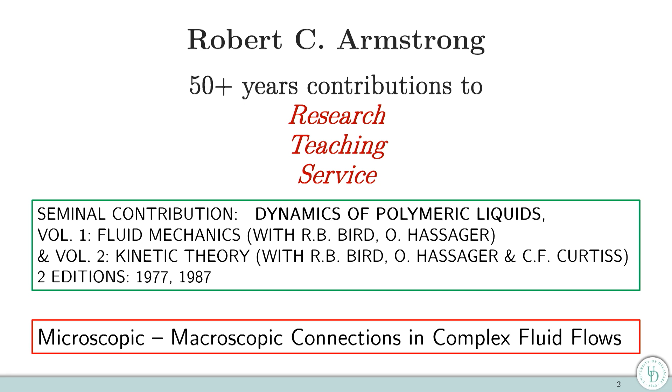But before that, let me say a few words. It gives me great pleasure to be here to participate in the celebration of 50 plus years of contributions of Bob in research, teaching, and service, and a contribution that I would like to singularly highlight. It has already been mentioned many times. It's the critical participation in this monumental work together with Bob Bird, Ole Hassager, and Curtiss in developing this dual exposure both in macroscopic fluid mechanics and in microscopic kinetic theory of the dynamics of polymeric liquids.

And it's really this connection between microscopic and macroscopic that has influenced me the most since the time that I worked with Bob and Bob, especially the contributions of Bob Armstrong in this microscopic development, whereas with Bob Brown we emphasized a lot more the macroscopic developments and the computational ones. So I want to bring forward this connection to my most recent work, which deals with a different system than polymeric liquids, that of aggregating suspensions, which are very common, from drilling fluids to blood, clay, ceramic suspensions, food, and so forth.

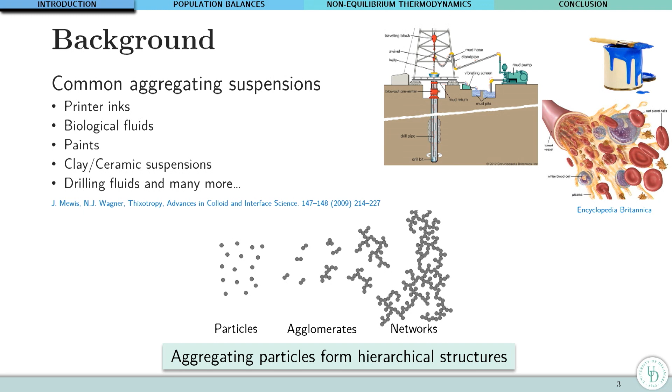Really, the key characteristic and connection with polymers is the development of an intermediate mesostructure, which eventually has a lot to do with polymeric networks. And this is one of the contributions in their modeling. But one needs to take into account the microstructure. So this is what I would like to highlight here, the influence of the microstructure in the development of proper models.

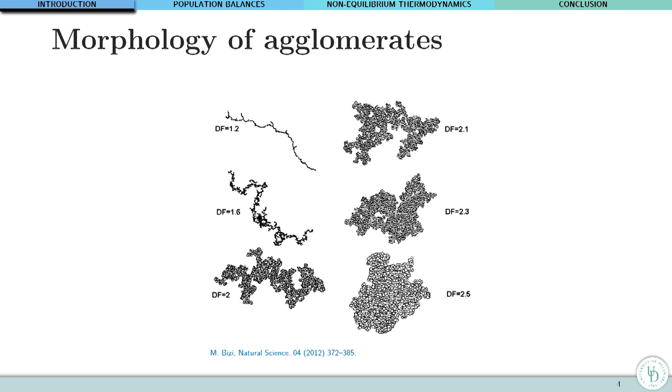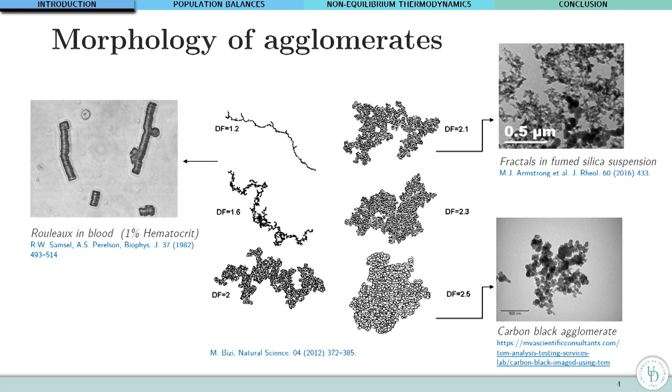And this microstructure can be very different depending on the characteristic dimension of the fractal structure that you end up having in most of these systems, as they tend to aggregate from a more or less linear structure, which is commonly seen with rouleaux in blood, to a planar structure seen in aggregating fumed silica suspensions, to a more globular one that you see in carbon black with dimensions going close to 3. So how do you explore these changes in developing a proper framework? These are the examples that I just mentioned, from blood, from fumed silica, all the way to carbon black.

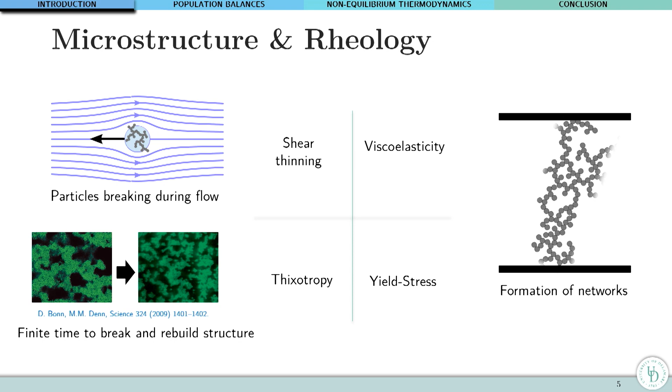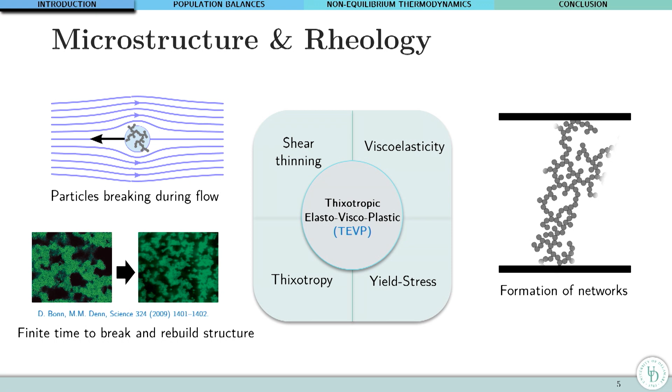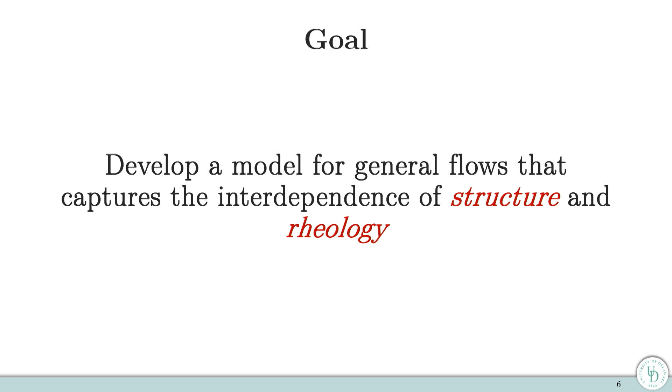From our perspective it was to find a proper way to connect structure and rheology within a framework that respects the thermodynamics. The two main ingredients I want to present to you involve, from the microscopic perspective, the use of a population balance approach, which Ramkrishna has been key to develop for many reacting systems, which in this case involves the analysis of processes that generate larger aggregates from smaller ones, as well as the breakdown of large aggregates into smaller ones, probably under the action of the flow.

And on the other hand, trying to incorporate this microscopic physics into a framework that is respectful of non-equilibrium thermodynamics, based essentially on a theory that I had developed after I left MIT, together with my former graduate student, Brian Edwards. He's now a professor at the University of Tennessee, and we exposed it in a research monograph entitled Thermodynamics of Flowing Systems, which appeared in 1994.

Essentially, the key component there is the description of the dynamics in terms of reversible phenomena, which can be described using a least action principle or Hamiltonian mechanics, and a dissipative contribution, which is described at this level in terms of a dissipation bracket describing the effect of a generalized functional. All right, so let's see very quickly just the schematics of how things work.

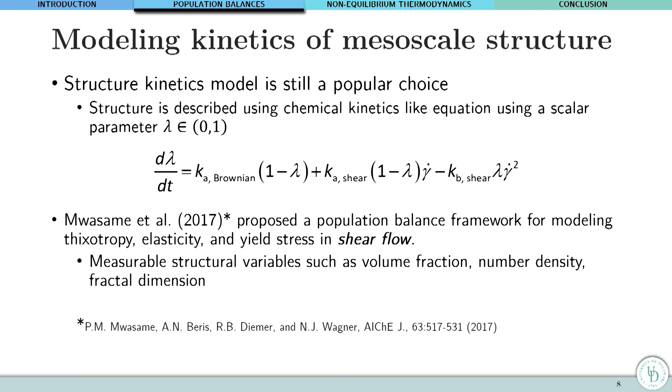So coupling this type of a kinetic expression with expressions for the stress that come typically from either the theory of plasticity or from viscoelasticity, many workers and also ourselves with our former student Mwasame came up with theories that were pretty good in predicting the behavior of aggregating systems fairly accurately, but with a problem. The problem was that the theory contained too many parameters and was primarily applicable only for shear flows. So if we want to extend it and reduce the number of parameters, this is where the microstructure comes to be of importance.

And using the population balance, just pay attention to the fact that there is a fundamental equation that describes the population of every size of aggregate, M representing the number of primary particles that constitute an aggregate. And this expression is an integral one which involves contributions which result either in the restructuring or the breakage of those structures, with well-specified kernels from previously developed expressions based on the collisions between different aggregates. So having this microscopic analysis, one connects it to rheology.

At the first stage, we did that simply developing expressions for the effective viscosity of suspensions that contain multiple aggregate sizes, and also evaluating an elastic contribution by connecting an effective modulus of elasticity to the effective volume fraction of the aggregates. As the aggregates have a fractal nature, they tend, when they form, to effectively increase their volume fraction and therefore their impact on the viscosity and rheology.

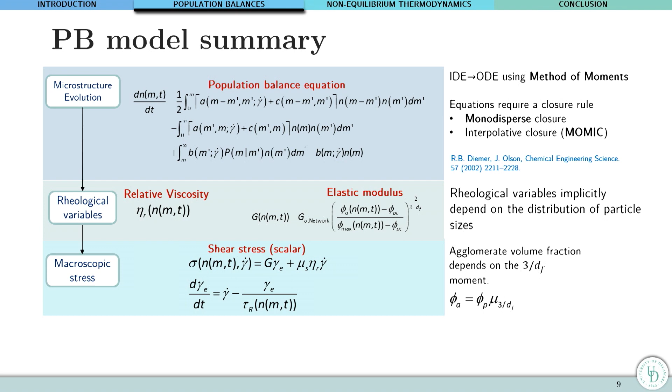One of them referred to blood rheology, where, as I mentioned, the aggregates are in the form of rouleaux structures, one-dimensional. And here is a comparison of steady-state data for the stress with respect to the shear rate for two different donors. The donor experimental data are given by the symbols. The dashed lines show the perfect agreement with the results of the previous theory that I mentioned, which was fully phenomenological. The present one, introducing additional constraints, gives semi-quantitative agreement only, but at least gives the promise that this is a way to move forward.

We also examined the behavior in transient flows, as for example the one that you obtain using unidirectional large amplitude oscillatory shear, where you superimpose oscillatory shear with steady shear, and you represent the behavior in terms of a curve that shows the stress versus the strain for different values of strain amplitude and frequency, and one can see reasonable agreement at high values, but some disagreement at lower values in this analysis.

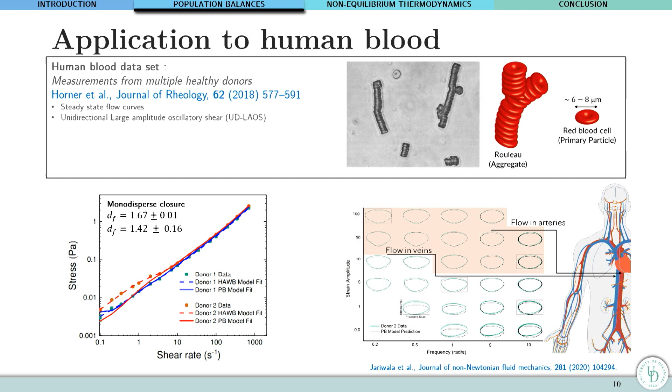So the next level: this analysis here was performed for simplicity by using a coarse level description of the microstructure, where all the aggregates were assumed to have the same effective size, which was allowed to vary with varying shear rate. The next evolution was to use this MOMIC approximation, which stands for moment interpolative closure, where we assume a certain distribution of the sizes, in this case a log-normal distribution, and we were able to accommodate more faithfully the change in size.

We did that approximation for a better behaved system which didn't have all the complexity of human blood, that is, that of carbon black suspension. And what we were able to show, as you can see now, is that for steady state data, we are now able to achieve a quantitative fit. And also, what is of importance, of course, the errors are uniformly much lower than the monodisperse previous approximation. And even more importantly, we did generate some data.

We had to fit rheology to obtain the best value for the dimension of the fractals. And that fitting value came very close to the independently evaluated value through small angle neutron scattering. And this is the detail of the analysis that allows us now not only to see a change in the mean size of the aggregates with increasing shear rate from 5 to 2500 reciprocal seconds, but also a change in the width of the distribution.

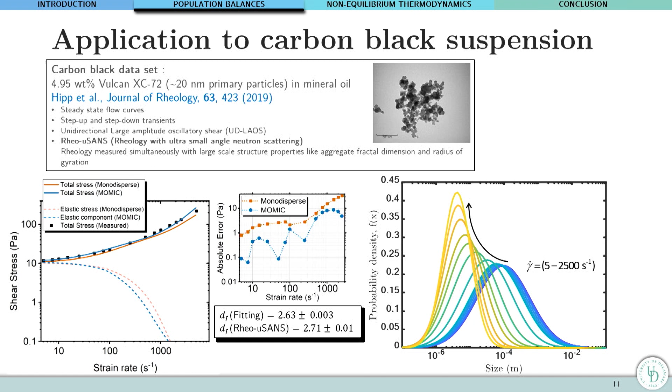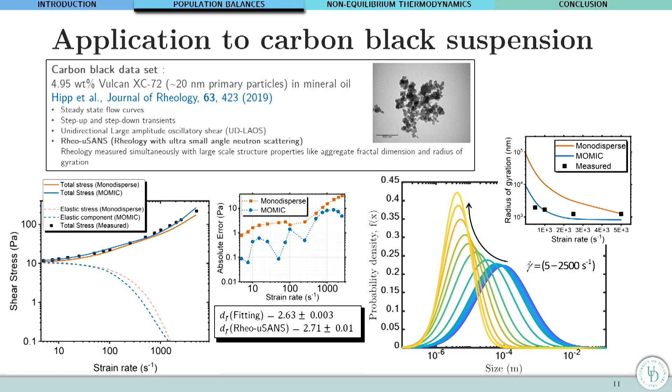Finally, the latest development is to incorporate this analysis within a consistent evaluation of the macroscopic equations based on non-equilibrium thermodynamics. I will only get you very quickly through the essence of the theory. It really imposes specific constraints so that in addition to satisfying, of course, the first law of thermodynamics, the constancy of the Hamiltonian, which is the total energy of the system, the entropy generation is always non-negative, and the dissipation reduces with a perfect satisfaction of the Onsager-Casimir reciprocal relations next to equilibrium.

The Poisson bracket, you get it by using Hamiltonian mechanics. In particular, you can get it directly from the least action principle. The irreversible dynamics, you get it by assuming a symmetric bilinear form. You start this expression by focusing on a number of variables, which for this system involves certain moments of the distribution and a conformation tensor to describe viscoelasticity.

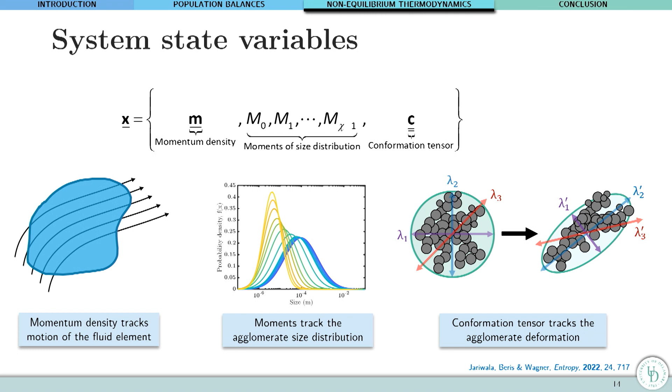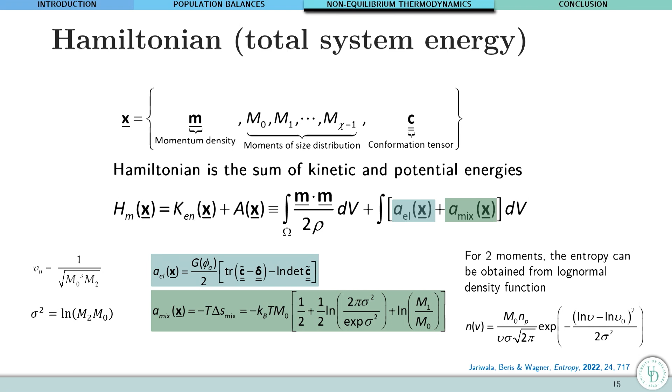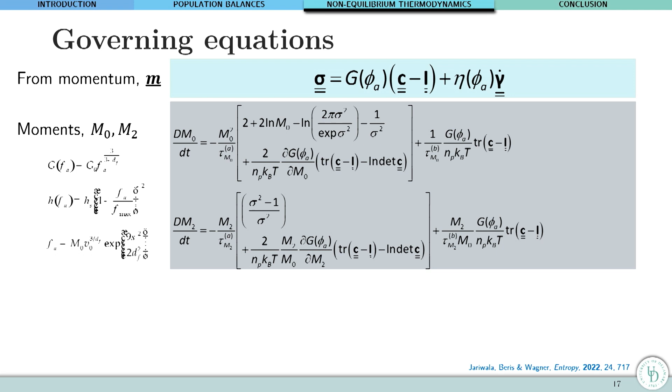So this really comes along with the kinetic theory that Bob pioneered describing the effects in polymer fluid mechanics using structure and conformations. And that is introduced into a consistent description of the Hamiltonian or total energy, which involves two terms, one describing elastic effects, the other one mixing effects. And then using moments, we can evaluate consistently those terms and then use the dissipation bracket. I won't bother you with the details. You can find them in this paper that appeared in Entropy last year.

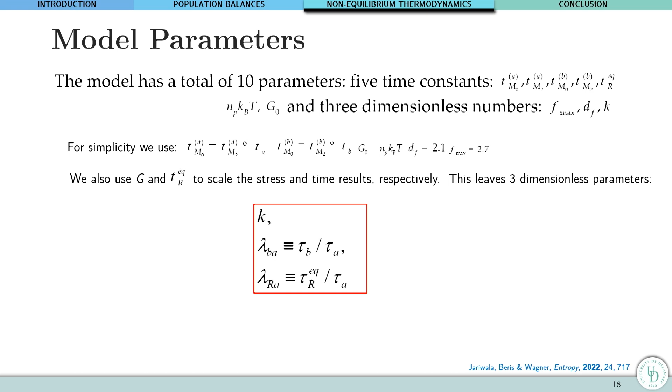But the fact is that there are calculations which you can go through and evaluate the final results. And at the end, in the final results, many of the parameters now have physical meaning. We can make reasonable assumptions, end up with only 3 parameters to vary, this K and 2 characteristic time constants, and then end up describing thixotropic viscoelastic behavior as an apparent viscoplasticity, as you can see here, because we just wanted to show in this work a proof of concept, but we describe very important effects that you couldn't get otherwise, genuine non-Newtonian effects, as for example, normal stresses that grow like the Weissenberg number at high Weissenberg numbers.

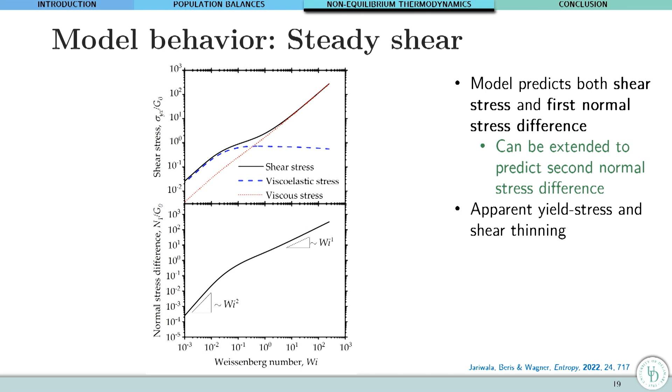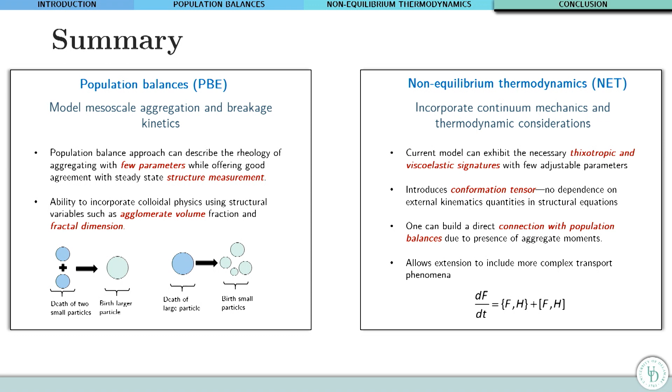So in summary, combining microscopic analysis with thermodynamics, we feel, is the path forward to be able to extend microscopic analysis results to arbitrary flows and describe fully non-Newtonian phenomena.

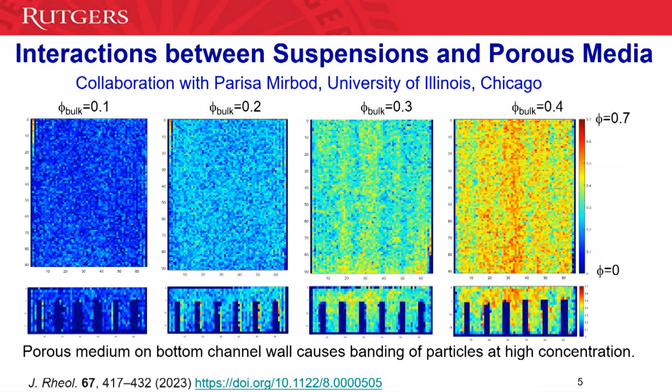So what we were able to see here is if we look at a top view of the channel, or if we look at the flow coming straight towards us, we can see that structures are forming in the particle concentration as we go from a semi-dilute suspension to a concentrated one. And we can see that banding is forming, which is dictated by the spacing of the porous media, since the particles find it easier to move in between the square array of rods than on top of them.

Another project that follows the suspension theme is cake filtration of catalyst materials, which is basically like separating an existing suspension. And this is how catalyst supports are collected after they're manufactured in solution. But with fine particles, as those supports typically are, it's difficult to predict what will happen during filtration.

Often it's hard to predict the pressure drop or flow rate, and typically because they're fine particles that can pack so closely together, you have issues with very low permeability. And it's hard to drain the solution out of the cake, and it's hard to wash it afterwards.

And so we've been working to try to identify key parameters that determine the filterability of catalyst materials, and also applying non-invasive imaging like nano-CT to characterize the filter cakes once they're formed. And typically they're considered like a black box. And so we're trying to look inside the black box of the filter cake and see what's the structure.

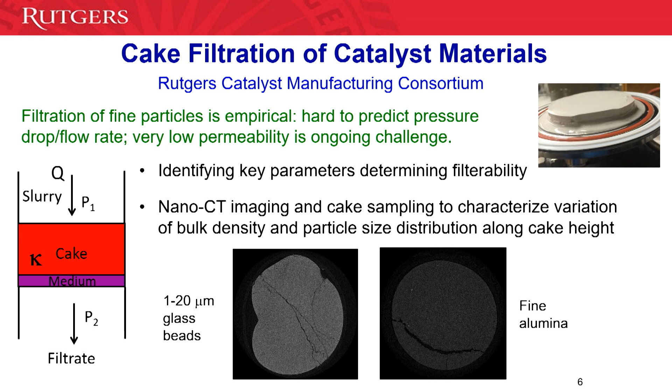And then in terms of the theme of sustainability, I've gotten very interested in the area of water purification. And so we also came up with a particle technology to aid water purification, where we used naturally abundant polymers like alginate and chitosan that are benign carbohydrates. And they also have a very high affinity for heavy metal ions. And so we make hydrogel particles out of these polymers, and we make aggregates out of the oppositely charged alginate and chitosan, and then we characterize their adsorption properties.

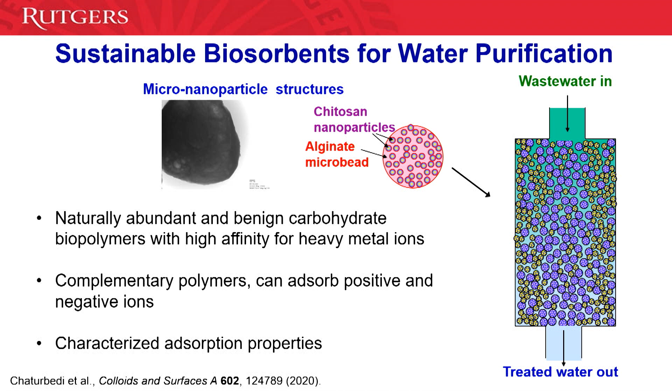And then I realized that I've also pursued some industrial collaborations that are related to sustainability, one with a big company and one with a very small company. With Andrei Potanin at Colgate-Palmolive, we were trying to understand the flow properties that lead to the heel. That's the material left behind after draining a tank. So if you imagine some personal care product like toothpaste or gel or shampoo, in the draining of a tank, we were trying to relate the presence of the heel to the flow properties such as the yield

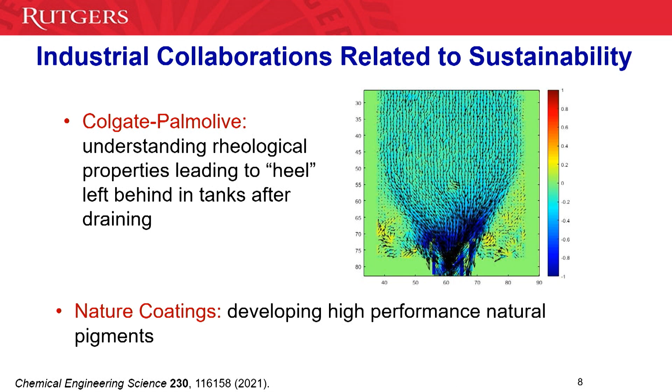stress and composition. And then with the startup company Nature Coatings, we've been developing high-performance natural pigments, trying to replace existing hazardous or synthetic materials with benign natural ones, but get the same level of performance in terms of binding to a fabric. So those are some themes from my group.

And then I wanted to add a slide about ideas about rheology and energy, since Gareth suggested that we should try to connect the morning and afternoon themes. So I wanted to highlight a recent project at Rutgers. I'm actually not part of this project, but I thought it was very interesting that I have some colleagues working on this. It's called RAFT. Basically, it's an array of turbines for hydrokinetic energy harvesting. The investigators are Onur Bilgen and Roger Wang in mechanical engineering and civil engineering at Rutgers. And I thought that hydrokinetic power was a really interesting idea where basically you're just trying to get energy from a flow of water with no dam or anything like that.

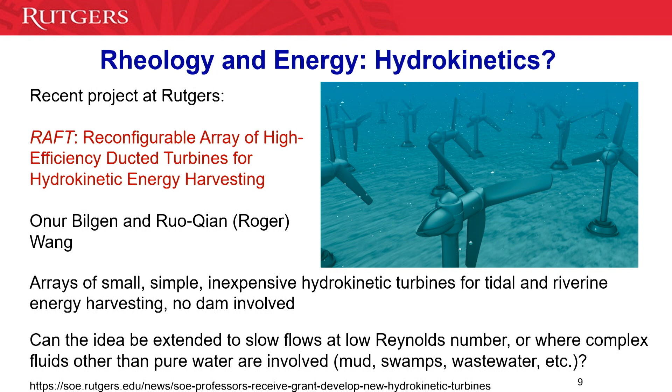And so what I was thinking was, can this idea be extended to low Reynolds number flows, where maybe you can use the unique properties of the low Reynolds number environment, or where you could use it on complex fluids other than pure water. And so I feel that hydrokinetic power hasn't been fully realized, and that it has potential for energy research of the future.

And then I just wanted to close with a story. When Bob and I would meet to talk about research, when I was a grad student, sometimes I would be explaining some problem with my experiment or some question I had to Bob, and he'd get this really, really far away look in his eye. And I would think, oh no, I'm boring Bob. I'm putting him to sleep. This is terrible. And so I would start talking more and telling him more things about my experiment.

And it took me until the very, very end of my PhD to realize that when Bob had that look, he was thinking, really concentrating, and that I should just listen quietly and he would tell me another great idea. So that's what I learned. So thank you, Bob, for everything you've done for me and all of the students, and congratulations. Thank you so much.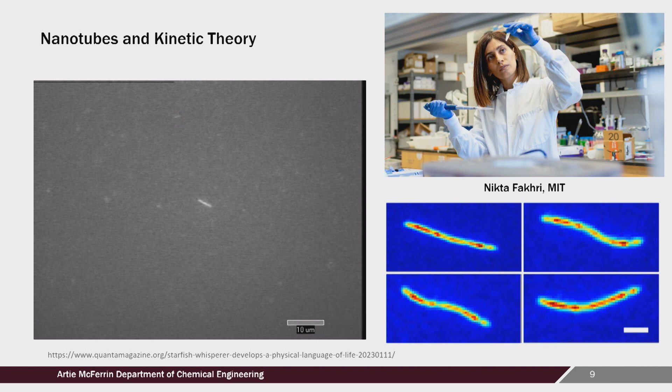And what's amazing is she used fluorescence imaging of nanotubes to go back and test theories about polymer dynamics that had been formed in the 70s, right? But it was like, now we have an actual model polymer we can look at and watch how these things move and watch how they diffuse, and actually showed which of these theories from the 1970s, work of de Gennes and others, would actually apply. We also applied these same kind of concepts to rheology of nanotube suspensions.

So sometimes you can get a little too deep into all the equations and you get to the point where it's just a math problem. But what you have to remember is the idea of ultimately there is going to be an experiment that measures the rheological behavior of these suspensions. So most of us are familiar with shear viscosity, shear measurements. But you can also do extensional viscosity measurements. Gareth has done a lot of work in that area.

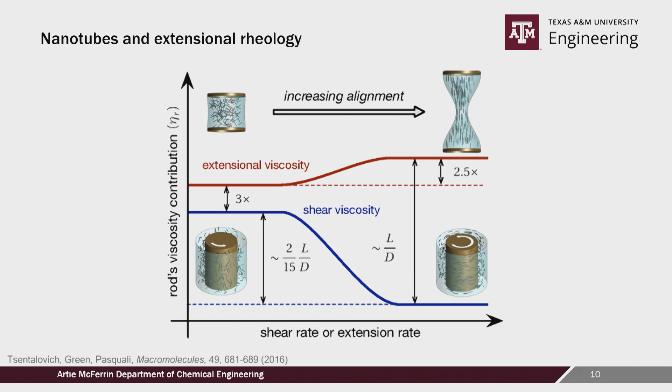And what's interesting is using kinetic theory, you can say, if I have a suspension of Brownian rods, can I predict the behavior, the shear rate dependence of the shear viscosity and the extensional viscosity? How does that relate to the length of the nanotubes? You can come up with equations that actually show, if you make the nanotubes longer, here's how that will impact their extensional viscosity behavior. And if you have that equation, then that means you can actually measure nanotube length with your rheometer.

And you think like, is that good? Is that good to use a rheometer? Wouldn't it be better to use a microscope? When you use a microscope, you're seeing a few dozen nanotubes at best, whereas you're seeing trillions of nanotubes in their collective behavior and the way it cashes out in their rheological behavior.

So we got to the point where we could measure the extensional rheological behavior of nanotube dispersions and the shear rheological behavior of nanotube dispersions and back out the nanotube length. Isn't that amazing that you can do bulk rheological measurements on a big giant rheometer and back out nanoscale quantities? But that's what theory allows you to do.

Just to continue on to some of the work that's going on in my own group, one of the things we've become known for at Texas A&M is using electric fields on nanomaterials. It turns out nanotubes heat up like crazy in response to electric fields, and that turns out to be really useful for lots of practical applications. But one of my students also noted recently, said there is some stuff in the literature on how nanotubes will actually align in response to these electric fields.

And so he did a series of experiments where he showed, yes, the nanotubes will align in response to the electric fields, but they also heat up. So if you have the nanotubes in a thermosetting resin, like epoxy, you actually have a race. Which one will win? Will the nanotube be able to align? Or because it heats, will it cure the polymer around it and lock itself in place? And depending on how you tune that electric field, you can see both behaviors happen.

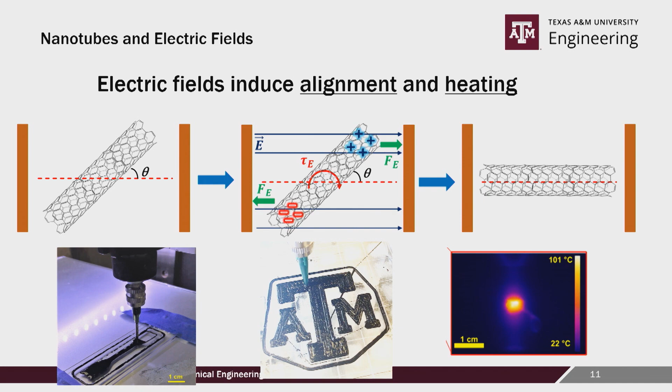And even if you manage to get your tower of epoxy to hold, you go set it in the oven and you begin to heat it up to cure. And what happens to the viscosity as you heat it up? The viscosity goes down, then it begins to cure, and then it goes back up.

So to get around those problems, we used electric fields, not just to align, but to heat these nanotubes so that as you print, it cures the resin. So instead of like building this little tower and hoping to God that it doesn't fall down, you print a layer and then use the electric field, cure a layer, print, cure, print, cure, print, cure. And you can print virtually any thermosetting structure you can think of using that technique.

That paper should be coming out fairly soon. But more important than any of the technical things that I got to discuss with Bob, Bob was really a mentor to me in terms of my career and work-life balance and things like that. Those of you who know me know I have a little bit of nervous energy sometimes. I'm a little bit of a nervous Nelly, as my father would say, and I was nervous about the prospect of going into academia. I mentioned this to Bob.

I thought, getting an academic job is scary. The tenure clock is scary. All these things are scary. And as y'all know, Bob is a pretty low stress individual. And he told me something, and I'll never forget it. He said, Micah, what you should do is work on the problems you think are interesting and important. And in terms of the time that you have to put in and work-life balance, you should work how much you think is appropriate. And if that doesn't get you tenure, then you don't want to be there anyway.

And at the time I thought, easy for you to say, very easy for you to say. But now that I've been through a lot of this, I now see that he was right. And part of what he was communicating is that the work is not something that we do to prove that we can do it, to prove that we're smart, or to build up our own value and identity. That's not the point. The reason we care about our research is because it's a beautiful, wonderful opportunity that most humans will never have.

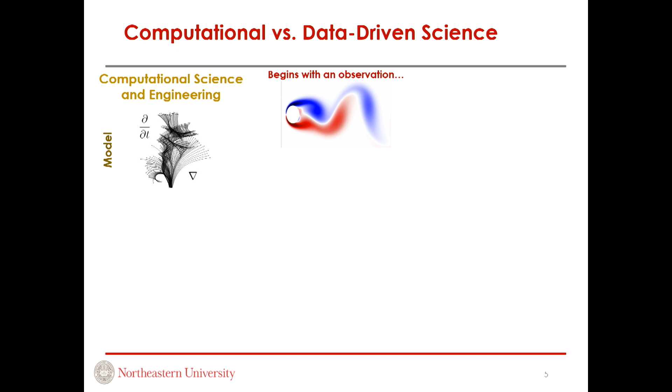So no matter if you're thinking about computational or data-driven sciences, you always start with an observation. This is an example that fluid mechanicians love, flow past a cylinder. In computational science and engineering, what you do is you take a model that describes that phenomenon. For example, that could be Navier-Stokes, your conservation laws, your equations of interest. You discretize that equation over a certain domain using polynomials, different weight functions, you name it, and then you pick a numerical solver to solve it for that particular flow problem using the methods that I already mentioned.

In data-driven sciences, you can still use the same model. So the guiding principles, the physics, is still exactly the same. Instead of discretizing it, you represent it through different methods that are data-driven, for example, neural networks, transformers, graphs. And then, instead of numerically solving it, you use inference models like Bayesian inference or maximum likelihood. And that allows for the solution of that particular problem. Now, again, the key is there, right? To be able to put the model into your machine learning platform.

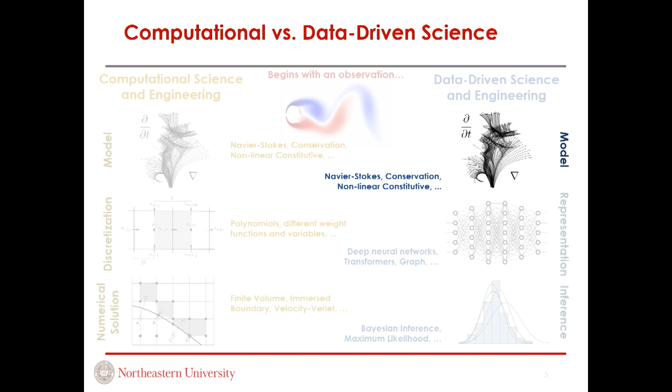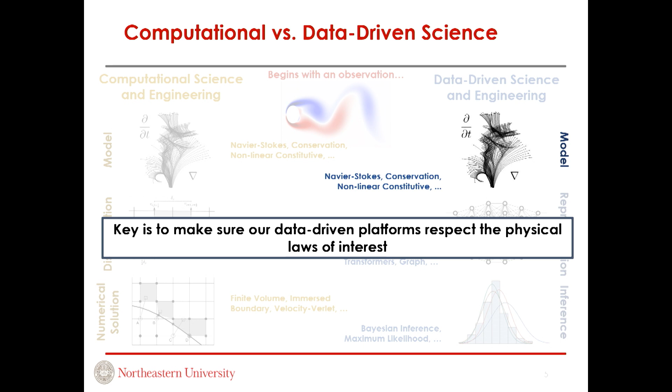So really, the key is to make sure our data-driven tools respect the physics that we want to respect. Again, that has been at least fundamentally done in that 2017 paper, which showed that you can put different differential equations into neural networks. And I started basically doing the same thing for rheologically relevant equations. So you can do that implicitly through what we call multi-fidelity neural networks.

We work with Procter & Gamble in trying to go from formulation in Head & Shoulders shampoo to what is the rheology. So we actually reduced the design cycle for P&G from over 2 years to about 2 months. And that's real money for industry, right?

You can put in, again, your equations explicitly in physical form, and then you can basically couple that with your conservation equations and make predictions of any flow field that you want for non-Newtonian fluids, for any arbitrary geometry that you want. And then later, what we showed was that you can actually mix these two approaches, implicit and explicit physics, to build the next generation of constitutive equations. So this is a piece of that work.

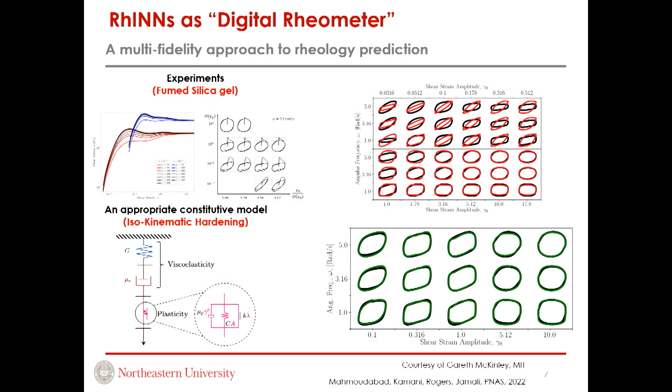The green here is the neural network predictions of a very complex fumed silica gel under a wide range of parameters. And the black is actually experiments. So you're mixing physical laws that you believe in with a very few experimental measurements, and you make predictions that are really, really accurate.

Some other work that we have done in the field is, for example, you can let the data choose the model, right? Instead of choosing the model yourself, you can let the data choose the model. You can do any differential equation. This is a recent work we did in using neural networks to solve fractional differential equations. Those are not easy to work with numerically.

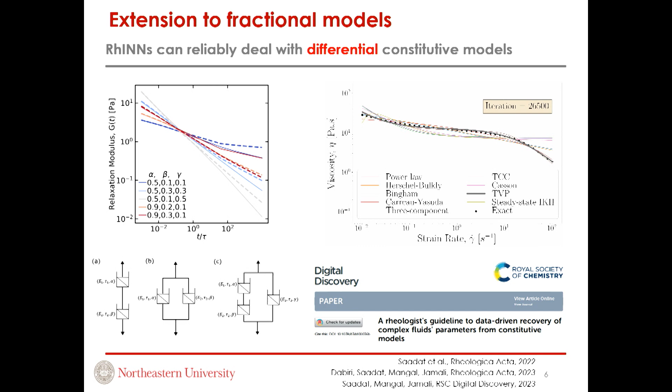And we recently published a guideline to data-driven rheology in general, how other people can pick it up and actually do this in a user-friendly way with the rigor and robustness that we expect from any tool in that area. This is the very recent work we've done.

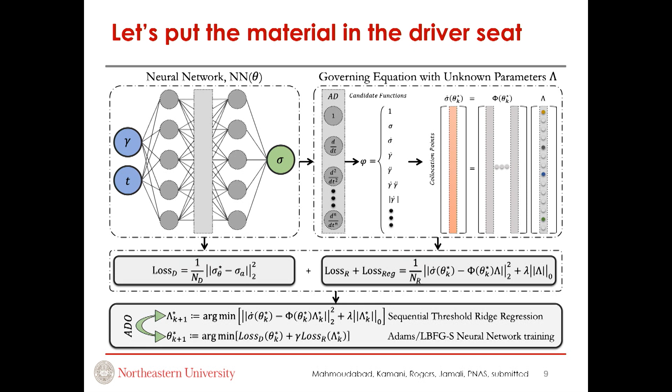Again, my take on this one is, for example, how can we put the material in the driver's seat instead of deriving our constitutive equations ourselves, and let the material tell us what the equation should be. And it turns out you can. So this is the experiment on a Carbopol solution.

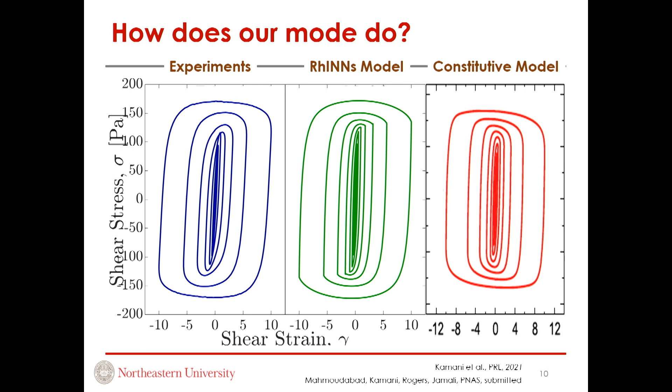This is what our rheology-informed neural networks picked out from 2 sets of experimental data in terms of a model. So they construct a very new constitutive equation that is this, and this is the best constitutive model out there. So you can compare how well this neural network that is injected with the right rheological information does. So very quickly, I'm just wrapping it up.

To me, data-driven rheology is the immediate future of this field, at least an extension of computational work. And again, I'm trying to follow the footprints of what Bob had done in the 70s and 80s in laying the foundation step by step to make sure that these computational tools are not used in a rush and that they're built in a robust and reliable way.

But I think these are key for the next maybe 10, 20, 30 years to bring together under an umbrella of, this is my term for it, rheology-informed neural networks, but data-driven techniques may just be the tool that brings together theory, experiment, computation, everything in a seamless way. And you can do model detection, characterization, you can go from formulation to rheology, and then you can actually do complex flow modeling with those.

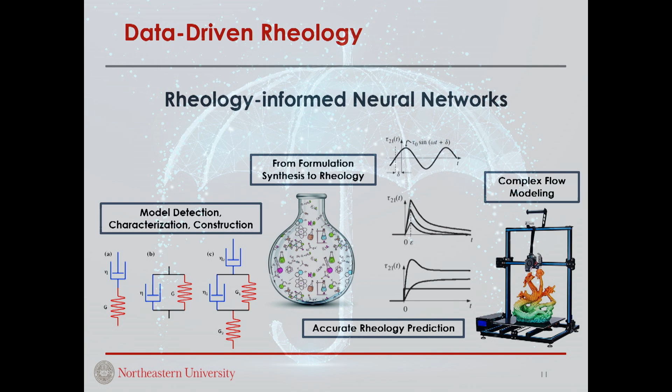I just listed 3 things here, and this is a little personal, but so Bob, you remember the first day I got here to start my postdoc, my very first meeting, I said, well, this is the first time we're meeting. Nice to meet you, Bob. And he goes, well, bad news, your project just got canceled. So we're gonna have to find another funding source for you.

So me being naive and desperate, I started throwing out ideas over the next couple of months. Can we do this? Can we do that? And then at some point, he sat me down and he goes, stop. I'll take care of you, right? But remember, you're not going to do a project or any scientific pursuit just because you have to.

Do something that you're proud of 5, 10, 15 years down the road. And that stuck with me, right? So he taught me you have to always pursue. So Micah was absolutely right. This is a privilege to do this job, but you have to always pursue what is meaningful, not what is expedient. I was going through some personal stuff at the time, and he taught me that mentorship goes beyond science. It's always personal.

Everybody here, I'm sure you have had personal experience that Bob was the most supportive person around, right? And I've been lucky to live in Boston, not to go far away. And he also showed me that mentorship never ends. I've been lucky to just drop a line, stop by and have a lunch and just pick his brain. So for all of that, thank you, Bob.